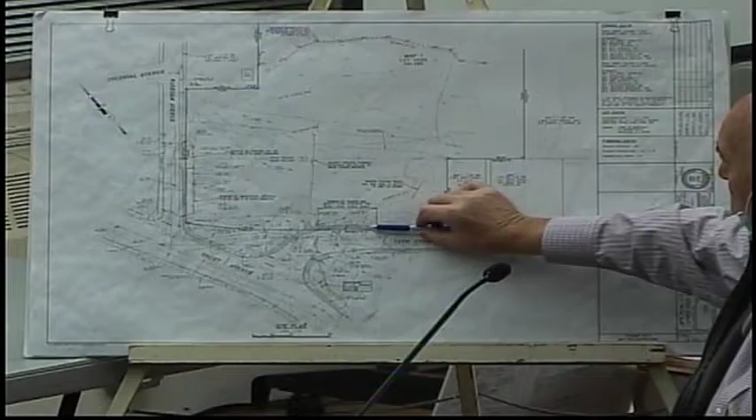For the most part, it is a site that's been used historically in Onset for parking. What we tried to do is indicate the portions of the site that would be subject to the redevelopment standards of the regulation. Dave was correct, we did show a portion of some work up here. This is the existing conditions plan that I have, the first one up here. I didn't bring a full set, I do have a full set if we need it. I gave each one of the members a half size. But this portion over here to the southeast is a portion of the site that is not part of the redeveloped area.

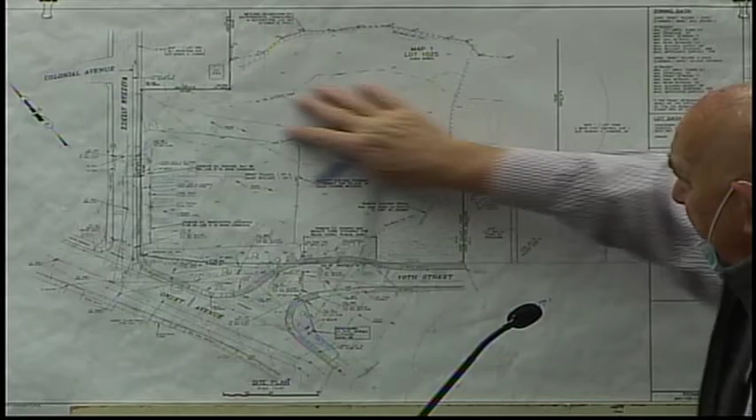I think we show pretty much where the parking is and where the disturbed areas are. It's easily identifiable with the paved area over here, but in this area here, it's predominantly gravel that's been parked on. Total site is around 57,000 square feet, and there's roughly 7,000 square feet of area over here that would not be considered redevelopment, as Dave pointed out.

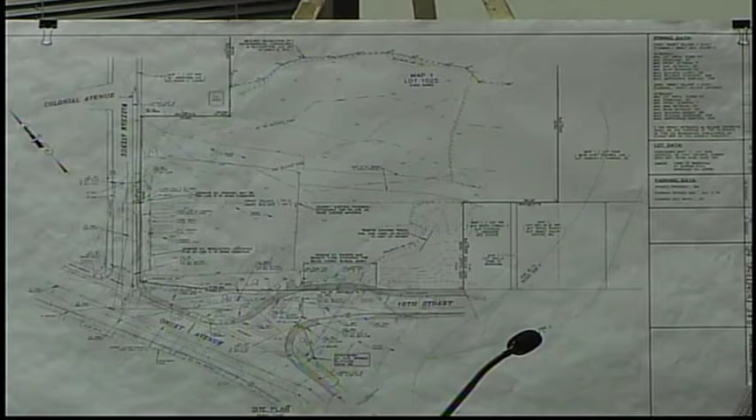Stormwater management on this site is pretty challenging in general due to the flat topography of it. It ranges from elevation 6 to 3 in the back, so it is very low, and it is in the coastal flood zone, as Dave has indicated.

The wetland system that we had flagged by Environmental Consulting Restoration really is at the back of the cut portion of the field, or the managed portion of the field, and I think where you see the flag in that back portion is where the wetland flag boundary is located. So that's where the wetland is, but everything flows to that wetland.

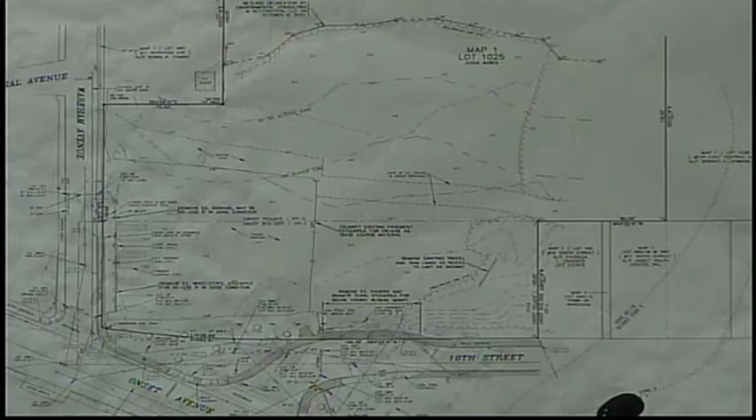We did do some research, we do have some very old files. We have not been able to determine whether there's any inlets or outlets into that wetland area. And I think when you look at it in context of the area as a whole, as shown on the locus sheet on the plan...

That is a pretty low-lying area within a densely developed portion of town. And to me, it reflects an area where perhaps drainage is being deposited as opposed to drainage being taken away from it. One of the first things that I would look at is where would that water go, and how would it get to any other location other than that low area.

It just seems that it wouldn't be real practical to have it piped from that centralized location to either that cove behind, Shell Point Cove, or into Onset Bay over by the boat ramp at 11th or 12th. So we did look for some of that data. We have not been able to uncover anything that shows us otherwise.

We looked at the Buzzards Bay Coalition mapping that they have of structures and what have you, and they noted a couple of things, but there were no outfalls noted on the plan. So we'll take Dave's suggestion and look a little more closely for that between now and the next meeting. I don't know how successful we will be, but we will put a good effort in to make that determination.

I did speak with Dave Menard about it. He doesn't have any real knowledge of any piping or structures that would drain that area away, but nevertheless, we'll go to the effort that we need to try to determine what's going on there.

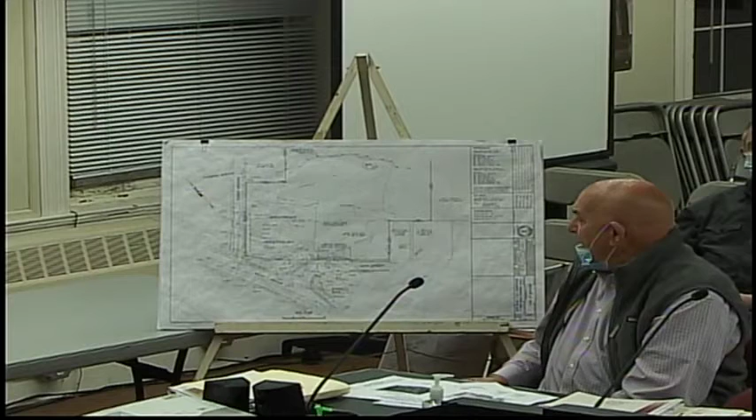But anyway, this is our site that we're dealing with. It's roughly 57,000 square feet, paved portion over here. The access comes off of Wareham Avenue, and that's pretty much what we have shown on that plan.

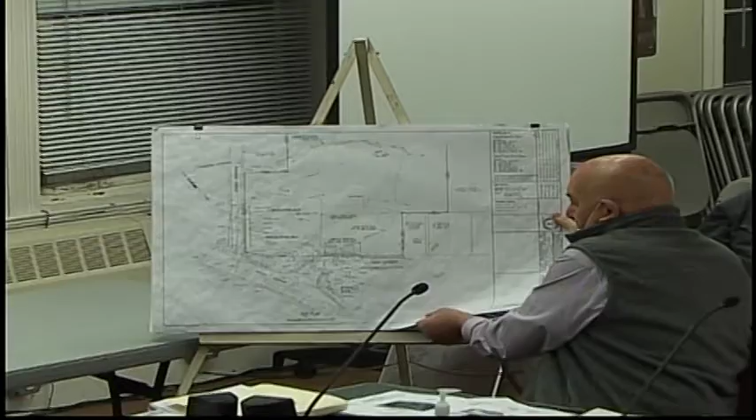This next sheet indicates the layout of the parking lot. As stated, it's a 94 stall parking layout. All the spaces are currently sized to meet the zoning requirements.

Spaces are 9.5 feet wide, and I think it's 19 feet in length. We show a total of 94. Driveway access points are 24 feet wide as required by zoning, so the impervious area that we're showing on the plan really boils down to the minimum area required by zoning.

I suppose if we wanted to increase the parking stall size, it may result in a reduction of spaces, but not necessarily a reduction in the entire impact on the site. So we show the parking field.

We have islands with some lighting on the four corners. We think it's important to place a little bit of lighting on the site for predominantly the off-seasonal use. We show four handicap spots by the main entrance. That's what would be required by the ADA accessibility code due to the number of stalls or spaces that are provided on the site.

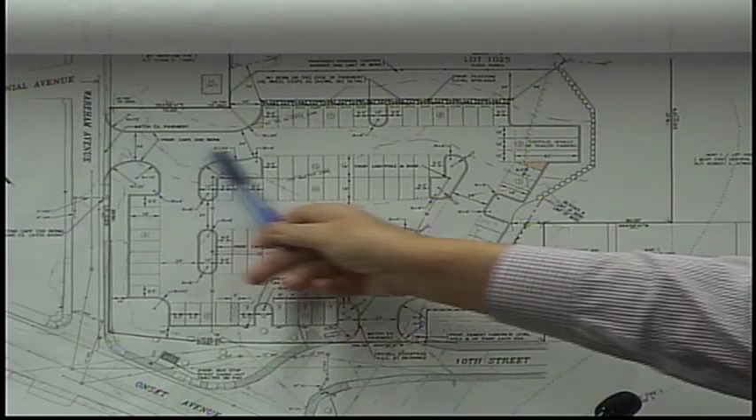Essentially, that's pretty much the overview of the site. We were asked to put a couple of oversized vehicle or trailer parking stalls on the site, so we looked at coming in from Wareham and placing those 40-foot-long stalls there. They could be for buses, for example, in the summer when tourists come into Onset, or they could be used for overflow parking for boat trailers that people might be putting in the water down at the Onset ramp by Dummy Bridge. So that's really what we have proposed here.

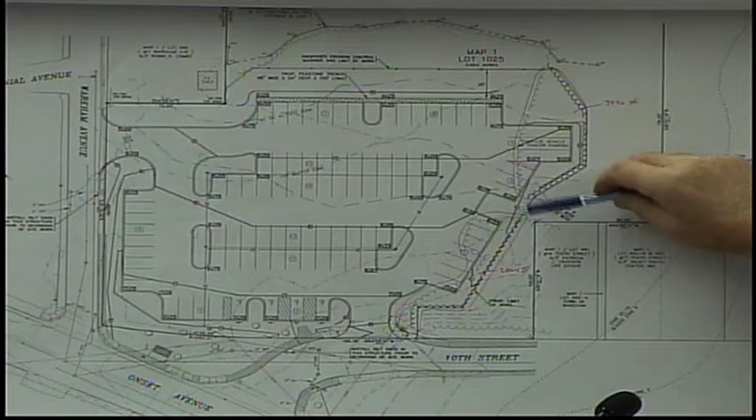I think Dave was correct. When we looked at the redevelopment portion, from a brief discussion with Dave, it looks like the redevelopment portion only extends up to the tree line where it's actively used. Looks like we have about 7,000 square feet of area, and we'll look at that more closely. It could be a little more than what we're showing on the plan, and depending on how we choose to deal with the stormwater, we might take a little more of this area and break the grade at this curb line, trying to shed things this way and keep it further away from the wetland system to comply with stormwater management needs.

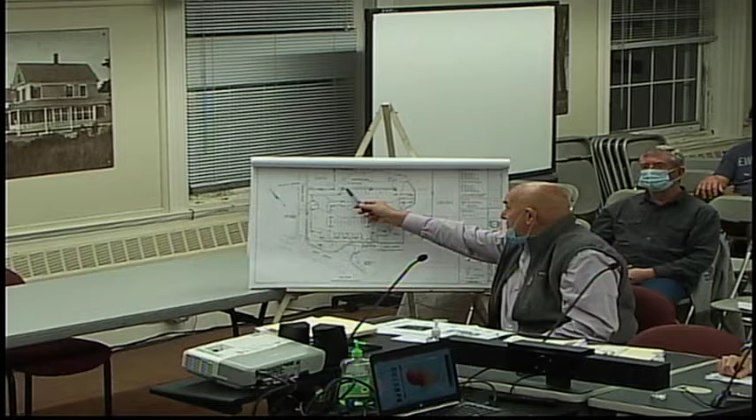With the depth of groundwater and the soils on the site—poor soils, as poor as we can get—and with the depth of groundwater, there are not a tremendous amount of options for stormwater treatment. So with respect to the redevelopment elements, we think we're able to improve existing conditions simply by placing some sort of drainage on the site, as well as some landscape islands, improving the overall features of the property. Taken collectively, these would result in an improvement to that area. I don't think it's disputable that it would not be considered an improvement, irrespective of the fact that we are adding some impervious surface there.

It just seems to us that for a municipal parking lot, the town would be best served by a hard-surfaced parking lot, one that's easier to maintain than, say, gravel or crushed stone. Crushed stone or gravel or RAP is just a little messier, and I don't know if the tracking of that all around Onset is something they'd like to see, or anybody would like to see, for that matter. Stones—I'm not a big fan of.

Kids like to throw stones, and I'd prefer not to see them throwing them around a parking lot where cars are. In fact, the trench we're looking to install at the end of the parking field is designed to use either 3/4 inch crushed stone or pea stone. The idea is to let water infiltrate into the ground, overflow, and flow across this turfed, grassed area into the neighboring wetland.

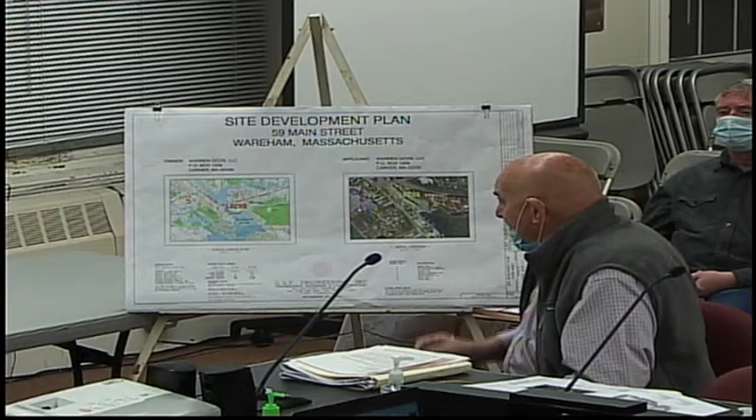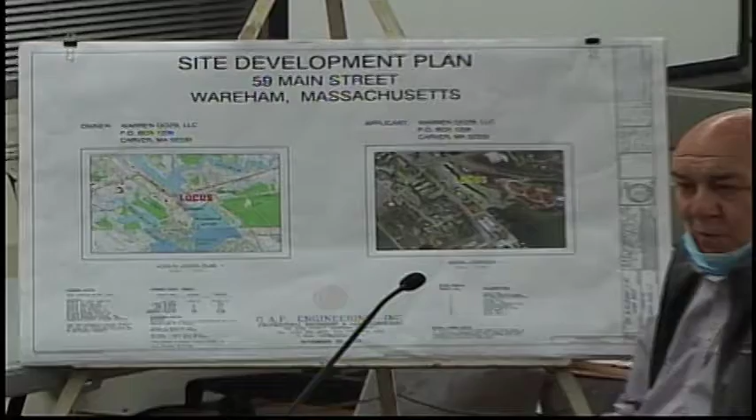Another question Dave had was parking, and I guess it all relates to stormwater management when we get down to it, but there's a parking schedule on the plan. It indicates we have the required parking for the 24 slip marina under zoning. Half a parking space per boat slip is required, so there's 12 spaces required for that. The restaurant of 150 seats requires one space per 5 seats, so there's 30 spaces provided for the restaurant. That puts us up to 42, and then the 1,200 square foot commercial building is 1 per 300 square feet, so that's 4 more. So we have 46 spaces on the site that match up to what's required by zoning.

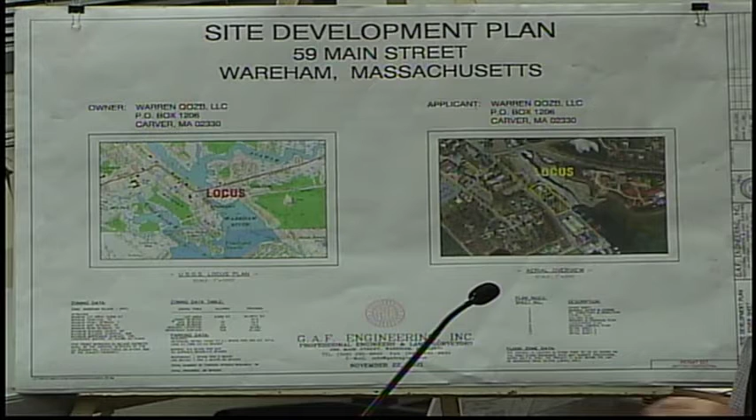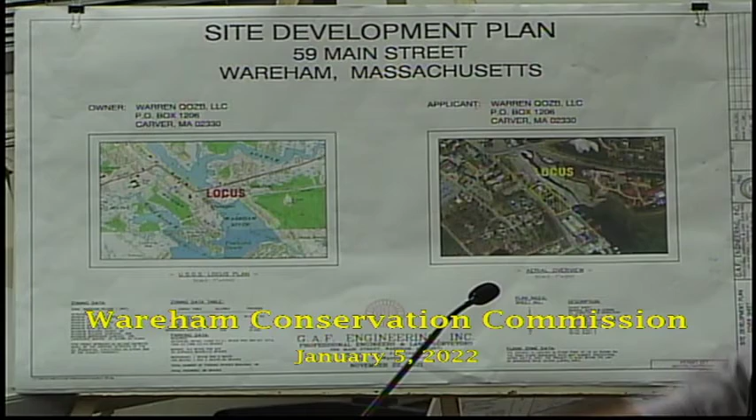I'll have you know that a question regarding parking was presented to us by the planning board on that. So I don't know what it means for this site. It might mean something someplace else, but we're able to comply with zoning there.

As Dave pointed out, this is sheet number 3, which indicates the existing site the way it is. There's a bulkhead that holds back the land from the Wareham River. That's an existing bulkhead, and the marina is going to operate off of that.

We show the site the way it exists today. There's also a line here of historic fill. The historic mean high water line is drawn straight across here, coming from a document prepared by BSC Group that indicated all the historic tide lines in pretty much the entire state.

So we're not able to do any work in that particular area on the site. If we were to do something there, I think we'd be into a different level of permitting with DEP. So we intentionally avoided placing any buildings or site improvements anywhere seaward of that line.

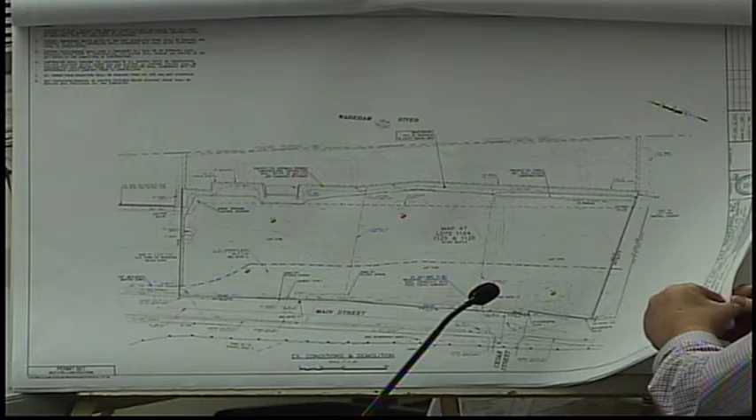But as Dave pointed out, it is all in the AE 17 flood zone, and all construction of the buildings would need to comply with FEMA regulations. We're AE 16? Did I hear that right? I think it was 17. Is it 17? Yeah, 17. That elevation has been standing out in my mind, so I'm pretty sure that's what it is.

This is the site plan that indicates the building, the pavilion, and the small commercial building. Here's the 65 by 100 restaurant building. The entrance is in the front of it, and we have a loading area on the side.

We talked about our drainage. We want to try to get the bulk of our drainage into the infiltration units, although I don't think it's terribly problematic to have runoff from downspouts, if properly controlled, discharge at grade, provided that they're not in an area where people are walking or vehicles are parking. So we've shown that as being deposited at grade, although we did consider putting some in those drainage basins.

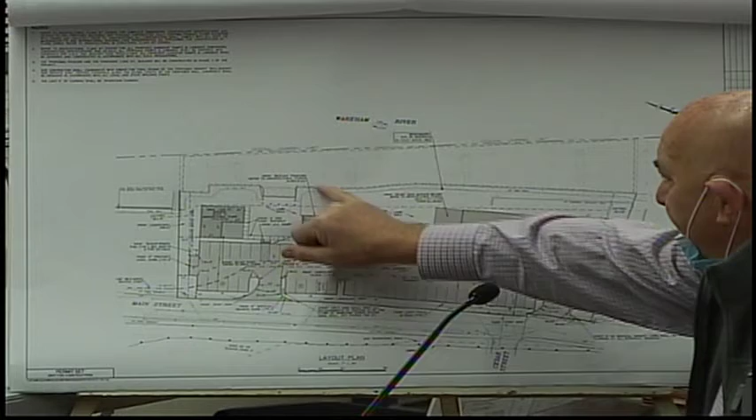You can see this gazebo, or pavilion, has been reduced in size. The revised plans that will be provided for conservation will show a smaller pavilion than what's on the plan in front of you now. And the 1,200 square foot commercial building is far to the north on this site.

The entrances come in on each end of the site, and we're able to provide the required number of parking spaces. There's a handicap ramp, and we've sited our handicap parking spaces directly across from the entrance. The handicap ramp is a switchback ramp because we're coming up roughly 5 feet from existing grade, so we need along the lines of 60 feet of ramp to come up the proper height.

There's also a set of stairs for patrons to enter the restaurant as well, and they can walk along this sidewalk and come into that building.

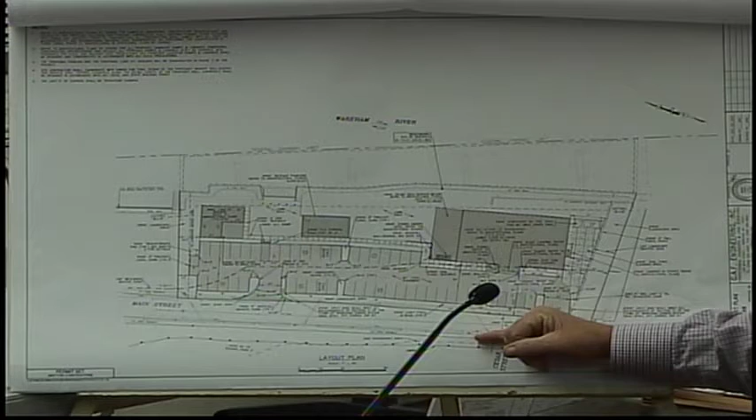Has anybody been to the Black Whale? Anybody in New Bedford? This is very similar to the way their entrance is set up. Their stairs come off to the front, but their ramp and switchback ramp next to a deck, it's very similar.

This stone-lined trench, we're dealing with stormwater in a similar manner as the Heinz Field job.

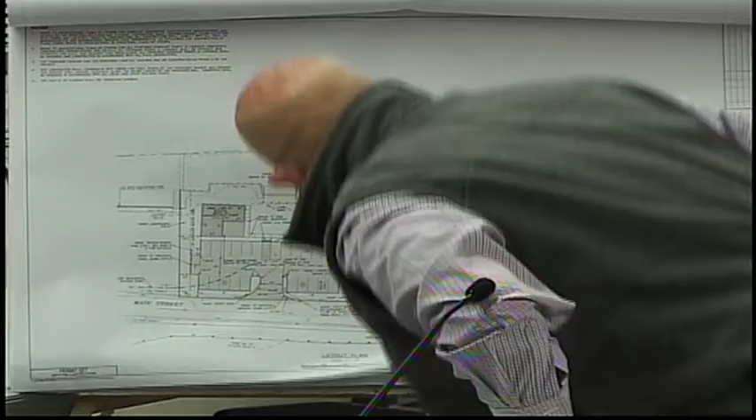So what we're doing is sheeting all of our water down to another one of these infiltration level spreader type trenches. The difference between this one and the one on the last job is this one will have a perforated pipe located within it. Within that pipe, we're going to tee off and go to two separate infiltration beds that will be below grade in the grassed areas.

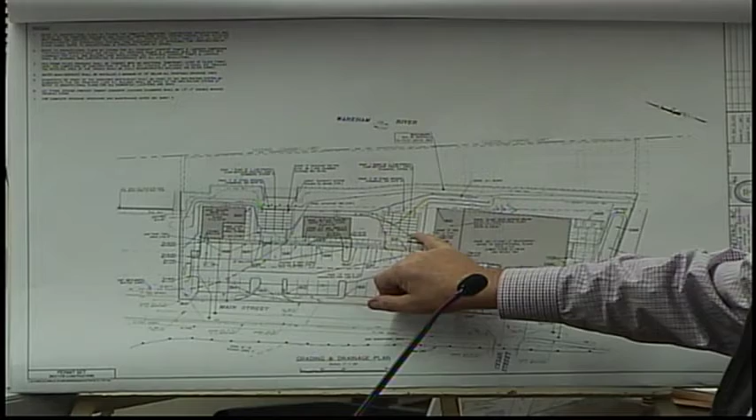So we're looking to take care of all of our TSS in this area and put the bulk of the stormwater into those infiltration beds. Again, since it's a redevelopment project, we don't need to meet the standards to the full extent, although we do have to improve existing conditions. I think we do that.

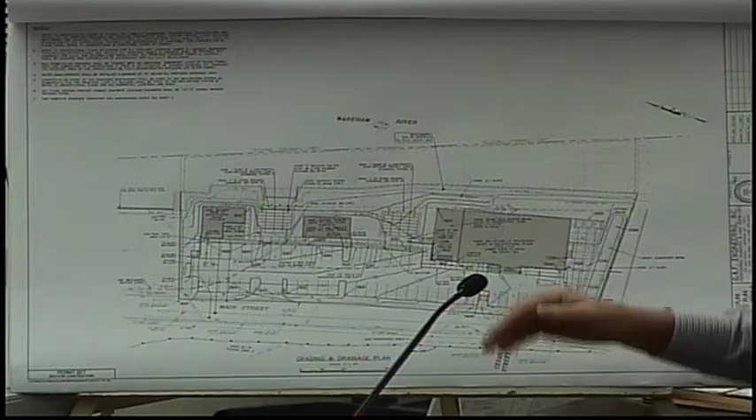We're showing our curbing or berm at the end of these parking stalls, so we're putting a number of 5-foot or 4-foot slots in that curb so the water won't take just one path into the stone trench, but several paths, and then find its way into those infiltration chambers. So that's what we're kind of doing there.

The site is served obviously by town water, town sewer, where we have a restaurant. There's a large grease trap here.

If there is to be an ice cream shop or something along those lines at the commercial building, we've indicated another grease trap to be located on the northerly end of the site. That's pretty much it. I think we improve existing conditions. All the construction will be FEMA flood zone compliant construction, and the structural engineers continue to work on the plans. Our footprints are all locked up pretty tight, so the plan that you have before you is the footprint that

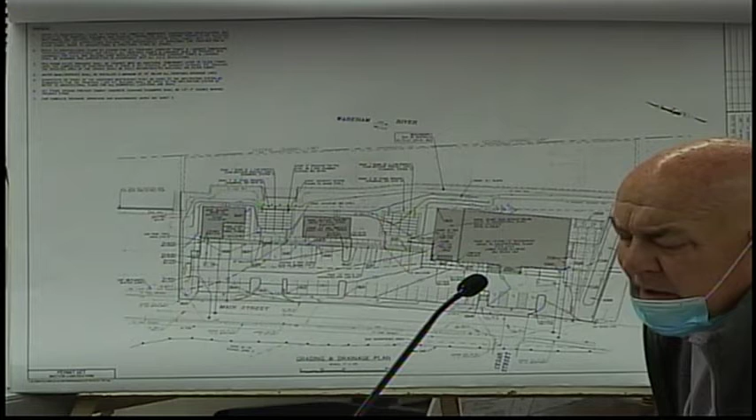Everything will be operating under. So we had water quality runoff from the buildings, parking, and the docks. That's pretty much what we have on that. I'll ask the board if they have any questions, because I have some and I'll wait for them.

Kwame, I'll start with you. Yeah, it looks like it's going to be an awesome type of environment when it's all said and done. But in the back of the structures you have landscaping, and what does that consist of, basically? That's my first question. Page 7 of the plan. Oh, it is on page 7? Again, grasses. Oh, okay.

These sheets are so big. I know. Yeah, the landscaping that we're proposing basically leaves the back of the building, where the back of the site runs up to the Wareham River, pretty much just turf more than anything. There wasn't. Losing my plan here. Look at that, you asked a question that's destroying the plans. That was my whole plan.

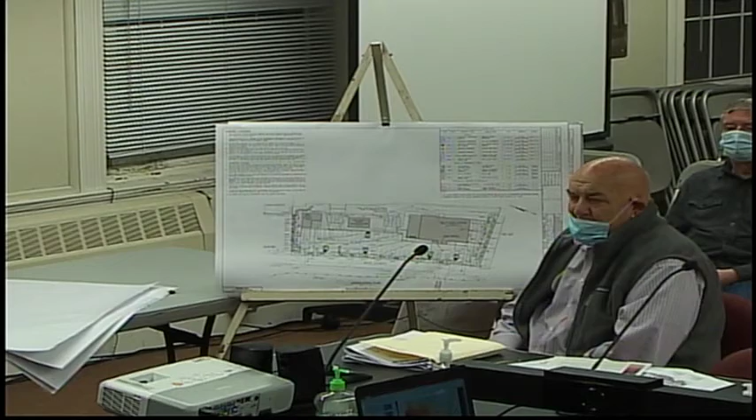I know that the people on the opposite side of the Wareham River are interested in seeing the view of the structures and what have you. I know that the people on Main Street, there's been some discussion with them as well as far as what the viewscape would look like from their properties. So that's what we put on the plan, basically perimeter landscaping with not much on the waterfront.

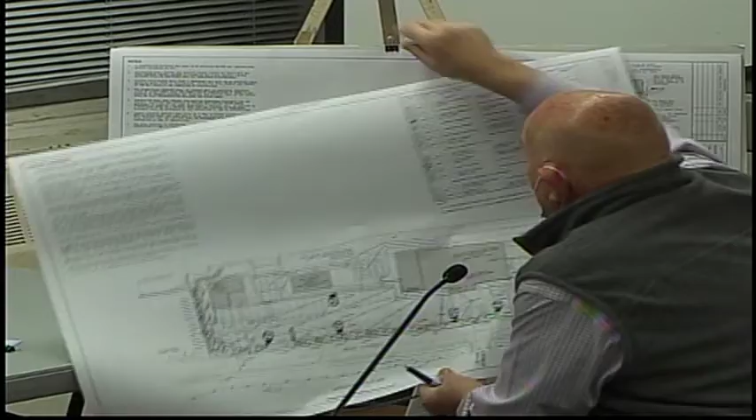Anything else? And I think erosion control, but I think you guys are going to have a good handle on that when it's all said and done. There should be an erosion control plan in here, next page somewhere. It indicates how we're going to handle that. We're showing construction entrances on each end of the site, and we show our perimeter siltation barriers that will basically isolate everything from the river.

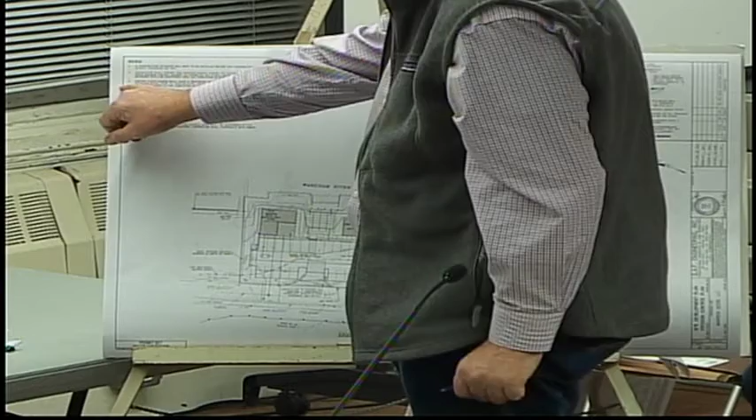I found it very confusing. It says see note 3, but then there are 3 sections of notes, and it's hard to say which note we were referring to, but that's just having to read the notes. I think that what they're referring to is that one. These notes, it's over here, it's not through all the general notes pages. Yeah. Okay, anything else, Kwame?

No, thanks. Thank you. Michael? Kwame actually beat me to it with a landscaping question, so I'm good. Go ahead. My concern is that there are several catch basins, one at the end of Cedar Street and one near the other entrance. How are you going to handle the runoff that exceeds the limit of the catch basins onto this property? Right now, we had a stormwater plan for Bessie Park to handle the flow of water coming down Lower Main and Cedar, and that got tabled. To me, if they're flooding now, overflowing the catch basins, it's going to impact this property and your plans to put them in those 2 areas.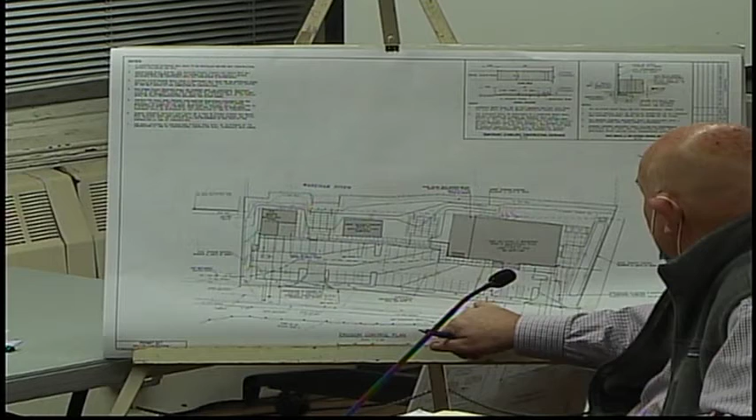Yeah, Cedar Street's very steep. There is a bunch of water that comes down there. There's some water that runs down Main Street as well. We have another, there is a catch basin further up gradient. There's another catch basin in front of our property. So there's a couple of catch basins there.

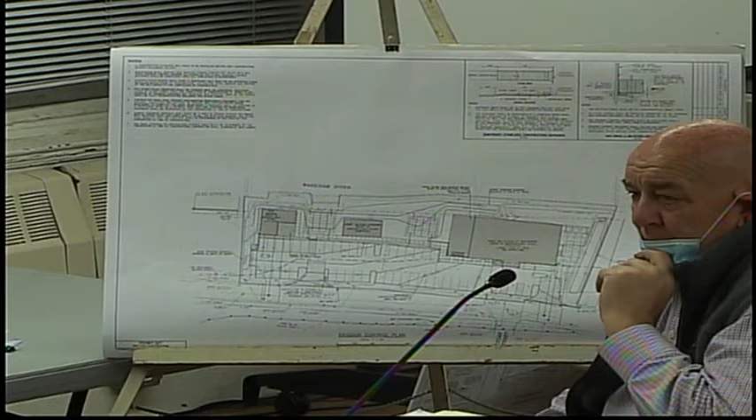I suppose that it's just something to consider, because if they're not maintained by the town, they're going to easily overflow like they are now. Okay. The question I have is that you have your concrete chambers for flow diffusion, and they'll be on the ground, but I don't see a path going out to the docks.

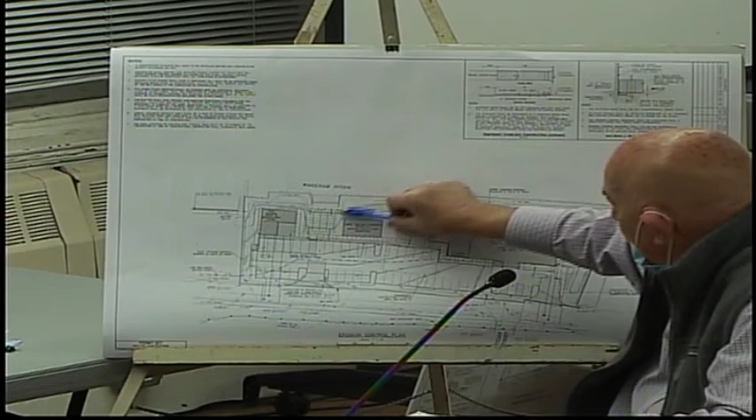How are people going to walk from where they park to the docks? They can walk right over any of this lawn area, it's going to be an open lawn walking area. So on the lawn, there won't be any sidewalks for them? There's one little sidewalk by the proposed building, but it doesn't go all the way down to the existing concrete walk along the pier. It's hard to believe there isn't a method of getting between the pavilion, the restaurant, and the proposed building to the concrete walkway, to get to the docks. It's a concern that we need to show a method of them getting their carts and stuff to their boats, and I don't see that here at all.

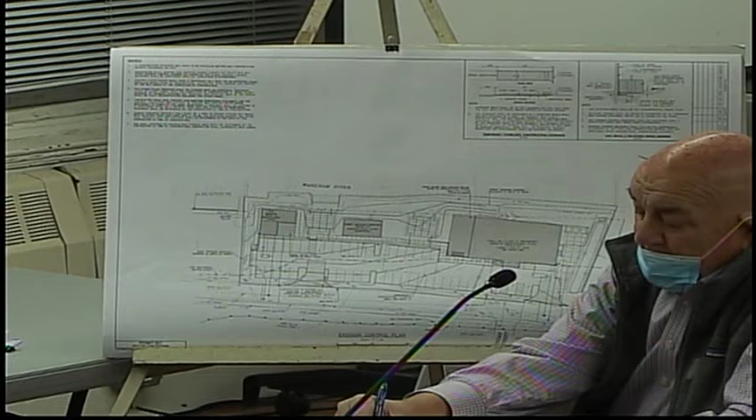Okay. Do you want to ask the questions that were submitted, Ron? Yeah, there wasn't too much on this one.

If memory serves, the open pavilion was to be used during summer season for weddings, etc., and the restaurant year-round. Is this still the case? Is that sort of what we're looking for? So then the rest of it, landscaping, they said they did not see landscaping, were looking for more definition. But I think we kind of talked about that with just the green space out behind, just being open grass. And that's all they had asked on this project.

Ron? I don't have any questions. Now that I see the plans, I'll be able to look at it a little bit more. I know we're going to get continued, so I'm sure I'll have questions at the next hearing. Thank you. I saw a couple hands.

Please be reminded that we'll only talk about those issues associated with wetlands, our wetland bylaws, nothing else. I see, is it Mr. Titlebaum?

Good evening, Peter Titlebaum. I support the project. I think some of the questions tonight were fair. I think the sidewalk access is a good point. People are bringing their carts, coolers, whatever. It would be nice if they have a sidewalk and a rolling surface to bring them along. It'll be better for the customers of the marina.

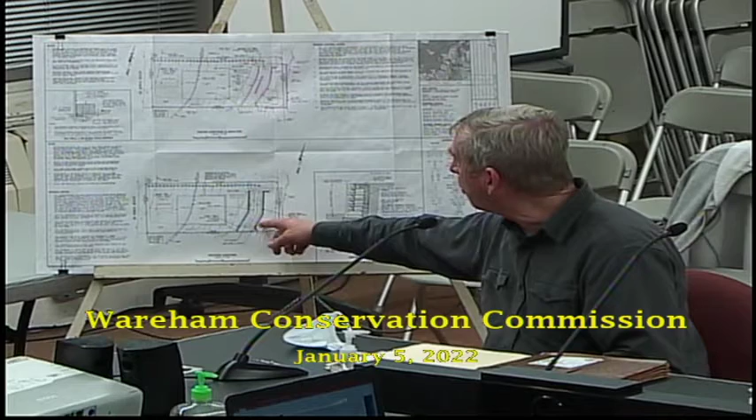So the lower wall would have about a 5-foot reveal, 10.5 top of wall, bottom of wall 5.5, and then it would just be informal lawn, non-fertilized lawn, and as David said, the vegetation along the property line was probably going to see some marsh migrate into the property, which is probably what it was years ago at some point. But that upper wall, you're not going to see it very much, just the capstone, but the purpose of that is really to stabilize the soil around the foundation of the home.

So what's the depth of that whole upper thing? Because right now there's really not much there except maybe a low wall. So what's required, how deep is that going to go? Just 1 or 2 courses, or what do you think on that, layers of blocks for that? How many layers of blocks on the upper wall?

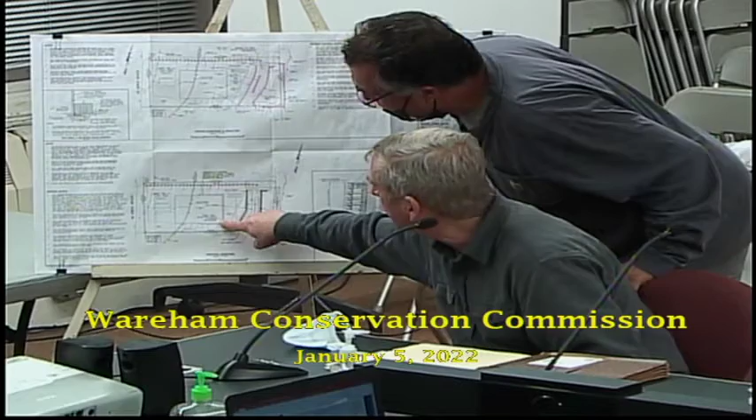So we're calling for the top of wall at 15.5, bottom of wall varies. We do have a 14, I think that's where David is referencing the 1.5 foot. But so how many blocks would we go below grade, Joe?

Soil stabilization, do you mind, is it okay if I talk? Yep, yeah, okay. Why, can you hear him? Yeah, you need to just talk into the mic. Oh, okay, that's all, we'll just switch.

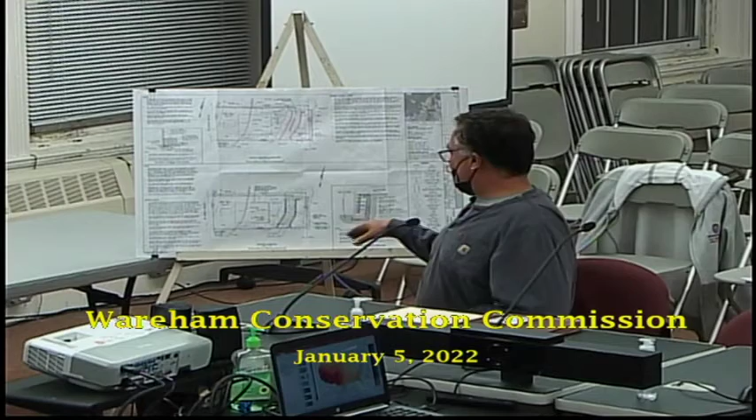So for soil stabilization, like what Bob was referencing, the base of this wall will be buried about equal to the height of the top block on the lower wall. So it would come in laterally and it would go up. Then we're going to fill this slope for the landscape grade. You can't put a base block, it puts a surcharge on the wall - that wall will sag down the hill eventually if it's not interlocked with the base, the lower wall.

So again, it would come in, and I know Bob did mention these blocks are gravity blocks. In a case like this, when we get to this top block, there would be a geogrid, more than likely - well, he shows a fabric right there, but there'd be a fabric, geogrid fabric, going back under that first block, and then that wall would get built.

But I mean, we saw this as the elevation being the finished elevation being the important part of that. Well, I'm just looking at it more in terms of the level of disturbance that you're talking about having to do to get that upper wall in - it's pretty significant. You gotta tear that whole bank apart.

So even to get this wall in, why we chose these blocks is they're pre-manufactured off-site, they come in all made up, no cement trucks, no pump truck getting material out there. To get these blocks in, we're gonna bring a mini-size excavator, just big enough to lift these. We're gonna bring that in.

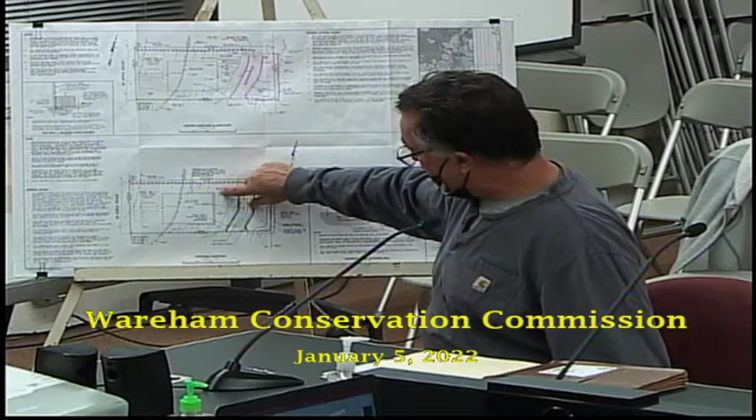This has to get excavated and shelved down, where we create a flat area, a shelf if you would, across this area to set these blocks. We're gonna work from the high side, set those blocks, then we'll fill that. We gotta work our way out, just like we'd paint a floor. Set these blocks, and as we're building this wall, when we get to height, we'll be filling this as we work backwards, because once this is filled to a slope, there's no machine in there anymore. This is a very tight site, and that's how the construction method would go.

To do that, what are you gonna do with all the material you have to move out of there to get the bottom wall in? Everything has to be hauled off-site, and then we have to bring it back. There's no other way to do that. It's not like there's a way to pile it. Our access is very limited.

There's gonna be a mini excavator and a track machine Bobcat. It'll carry the stuff out right into a truck, and we'll dump it. My yard's over the bridge from here, but hopefully I can find something closer for a storage area. I'm sure I will. At any rate, it gets hauled off, and we'll bring it back as we put it together. There's no other choice with that.

Did you get answered? Are you comfortable? And just for reference, the full-size blocks are about the size of this table.

They're the same footprint, the same blocks that were used at that site over in Onset where the guy put the wall in incorrectly, he couldn't do the corner, so he never did it. You're not talking about Crab Cove Terrace, are you? No, off of Prospect in Onset. So those are the size he's talking about.

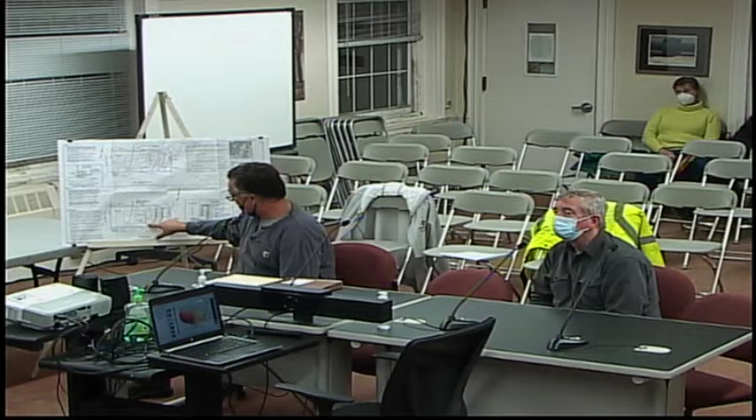As far as removing that, we have a mini excavator here. We can swing the bucket out to about where my fingernail is and set it down on the ground, and as we break those blocks by hand, we put them in the bucket and swing them up to the waiting Bobcat, which gets as far as this corner with the track. Now, will all this material be removed from the site? Absolutely, without a problem—I put my reputation on these jobs.

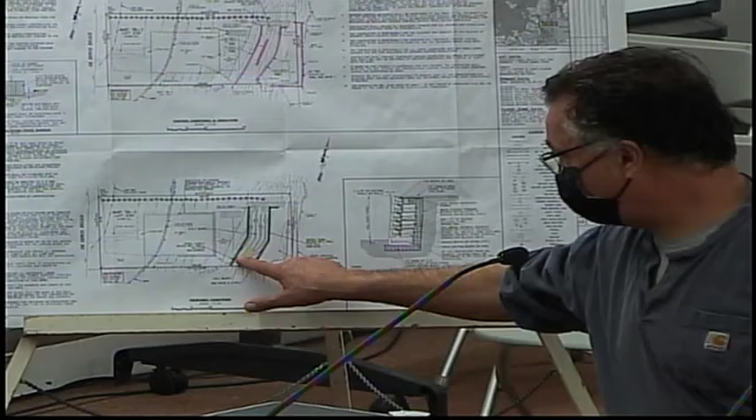One of the things that can happen if we need to - and I don't have a good picture of this in my mind right now - if we had to, we could lower this temporarily, dig some of this dirt out just to drop us down a little bit, more where the walls are down here. Yeah, but now on their neighboring piece of land, you're gonna be cutting into that slope. How are you gonna maintain that while this is all being done?

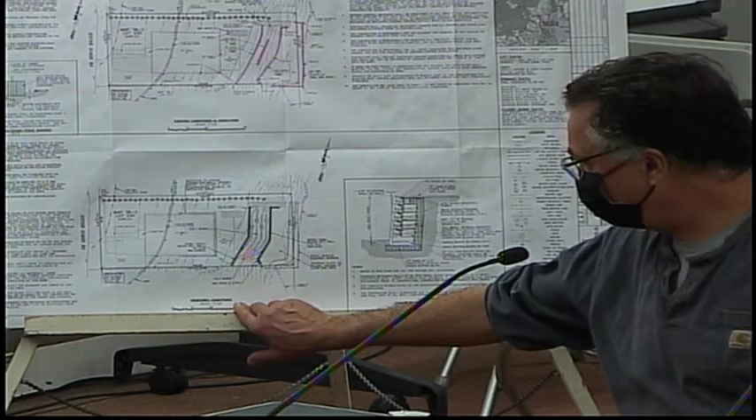And it's like a sponge - it was underwater today. Which I was about to ask, has that been happening in the past, say, 4 months? I don't mean to cut anybody off, I was just curious - past 4 months, let's say 4 or 5 months, have you been getting a lot of floods lately?

Sure, I mean, it happens on a regular basis, depending on the moon tide - which I was about to ask, because there have been moon tides lately. It happens on moon tides, it happens when there's storm surges that are identified on the news. It does occur - in fact, the water came up to Wychunas Ave today. And then we have 4 lots, and that corner lot that butts up to the retaining walls was under a couple of feet of water or more.

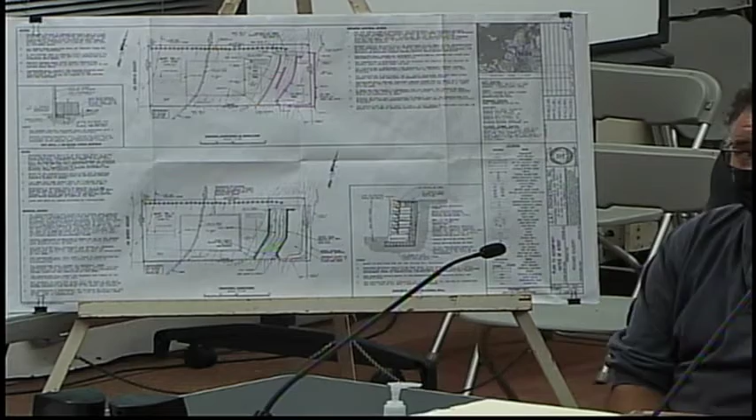I didn't measure it, but it was obliterated - that's really soft turf that's going to put your machines at risk. We'll be fine, that's why when you hear me mention the track machine, these aren't rubber-tired machines. They do fine in the sand. I don't know the exact grade, but it's not a gradual grade, it gets steep.

So Dave, to answer your question about working this slope: when we come down this way and get in here, we'll have this bank on our side. The way this wall's going to run, we'll have a little bit of dirt exposed, but nothing substantial we won't be able to maintain. There may be a little hourglassing if we hit that real fine sugar sand, but we'll put the blocks in and put that right back in place, almost simultaneously.

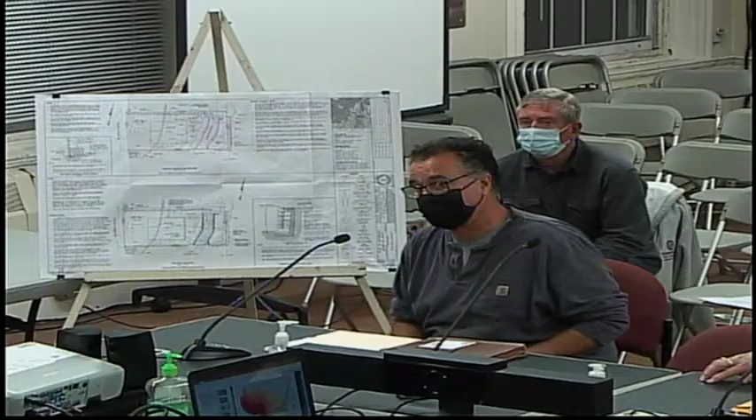So you'll keep the cut a few feet on the other side of the property line - where you're digging, you'll keep that edge a couple feet onto your property. We'll work this way, and as we get up to it, this will get dug and the blocks set all within the same day. So we're not going to leave that overnight with an open cliff - there'll never be an open cliff there to any degree.

Our biggest risk on that is more like the deck and the footings there - we have to watch out for those, but that's within our own property. This, I don't have any real worries with. Anything that gets disturbed will be fully restored, and if there's anything over the lot line, there may be some minor spillover, but we'll address that. I'll come over and see you, the neighbor, and make sure you're on board with everything going on, assuming it gets approved and I'm still the contractor for the job.

Do you have a business card? Not with me, but I'll make sure you get one.

While you're doing that, we have some questions - a couple of things from Denise and Elisa. The first thing they pointed out is that there were no stakes for them to see where the project was going to happen.